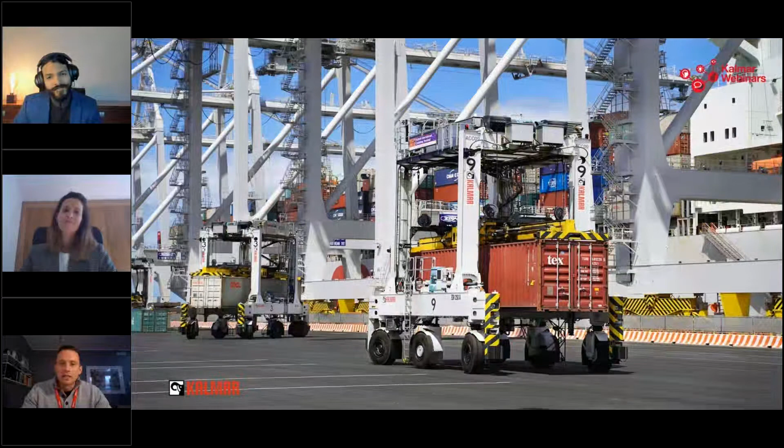Yeah, I would say it's like team figure skating—actually three words, at least in English, one word in Finnish, sorry about that. But I think my answer is quite aligned with Lucia's, because in team figure skating, everybody and everything has a crucial part as part of the team and part of the system, which then forms something beautiful that just flows. In case everybody or everything is not synchronized, the whole end result suffers. In figure skating, we're not meeting the score; in operational performance, it's then not met in a terminal environment. And also in team figure skating, sometimes accidents do happen—sometimes you might face a broken bone, and something more severe might happen.

Yeah, interesting. If you ask me, I would say complex. Even though terminal operation is just a link in the whole supply chain, there are so many interactions, so many sub-processes with different stakeholders within the terminal, and especially these days a lot of disruption. It really makes it quite complex, not only from the operational point of view, but also from the planning point of view.

So let's go now into our next question, the main topic for today: what is the difference between simulation and emulation?

Yeah, I would say that there are three different layers of operation. For example, here on the right-hand side, we could say it's a simulated environment where we have everything captured in one imaginary box. Then on the left-hand side, we have emulation, which has certain parts from the real world, but some parts are simulated.

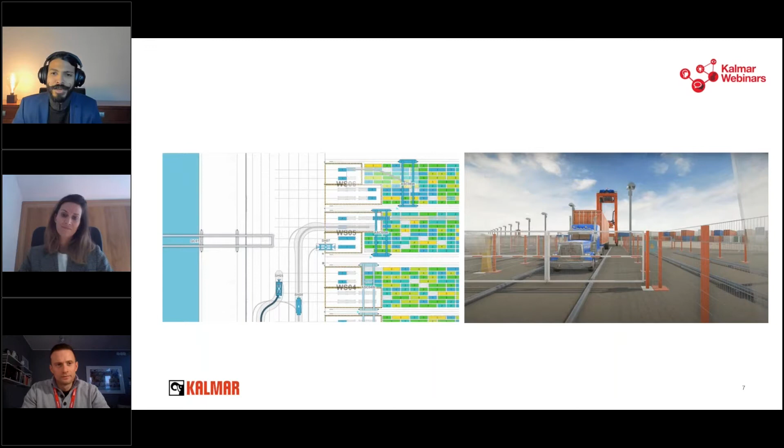So maybe that helps to get a more tangible image of what we talk about in the terminal environment every day. Yeah, really interesting thoughts, and it is important to be aware of the multiple ways we can use simulation and emulation. But now jumping into our next question, why do we need simulations?

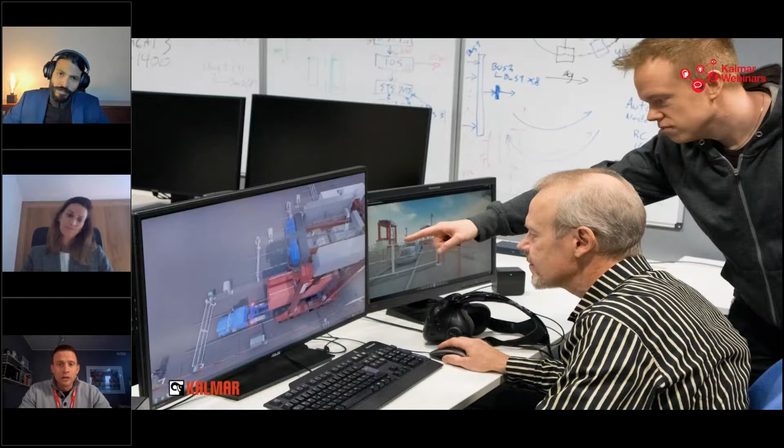I can take that one. I would say simulation is the quickest method to evaluate different operational concepts, for example different equipment types or levels of automation. With simulation, we can also get a first feeling of how a different layout would work for a particular terminal footprint, and it may raise questions you can then think about and find methods to answer those more detailed questions. Are you using emulation for that one, or do you need some other means?

Another example of using simulation is when the terminal wants to undergo a transformation, studying whether it's cost competitive to go from a straddle yard to an RTG yard that can provide more storage capacity. The simulation would enable modeling all those changes and evaluating, if I get such volumes, then it's more cost competitive, if not, etc. All this before doing any civil work, buying any machine, or undergoing any investment and the disruption of the terminal that all of this means, right?

Yeah, really interesting point, and it's a really useful tool to avoid assuming, just as Tommy mentioned. Any considerable change in a terminal layout would make sense to have a simulation done first. Yeah, and existing terminals that are not changing the operational concept can also benefit from simulation before major changes, for example changing the orientation of the stack. So Chris, question to you: how many terminal simulations do we roughly do in a year? Well, we're talking about 5 to 7.

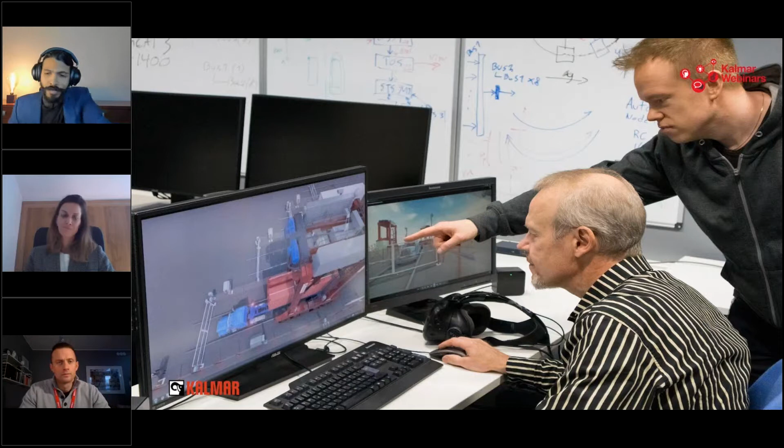So we got clear the difference between simulation and emulation, but then why do we need emulation? Any thoughts, Lucia? Yeah, I mean, emulation, for example, enables us to benchmark the performance of, for example, our scheduler or certain products. Also to fine-tune the settings, because there are different settings that you can adjust, especially on the equipment control side, that can provide you better results. So it allows you to try and test that and refine.

Yeah, as mentioned, for example, we use emulation to simulate the TOS, the GOS, equipment moves from the QC. We need all those simulators, the OCR readings when we are emulating. So in the end, you are testing a lot of integration, right? With the actual software component that is the most critical one, let's say, in the emulation that you're doing. Got it.

And how about you, Tommy? Yeah, I would say that mainly the emulation is used, in those deliveries where I have been involved, for quality assurance testing, QA in short, to ensure that the integration between the systems is working. Like Lucia explained, it happens in the delivery phase, but also during the lifetime of the terminal, when we do constant updates, or whenever updates need to be rolled out, they can be tested with the emulation environment before rolling them to the actual production.

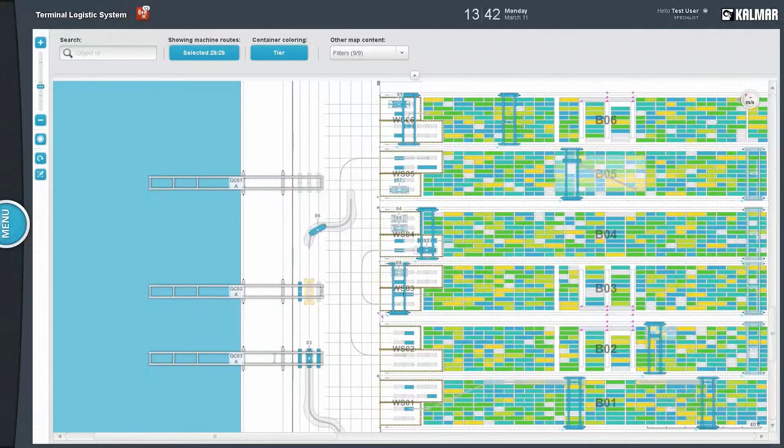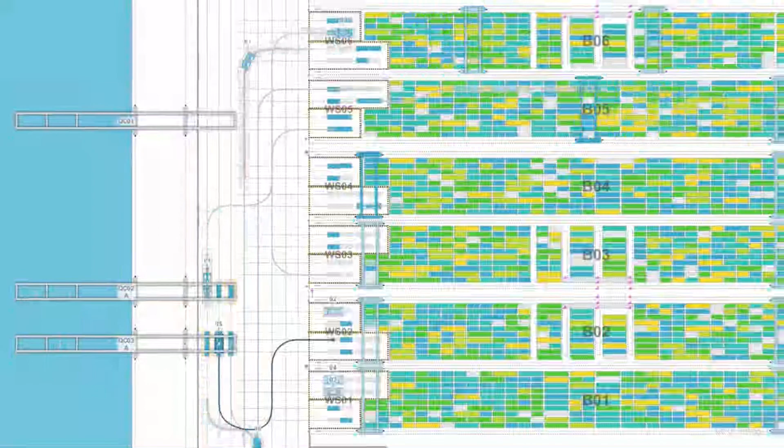So here we can see the actual piece of software, for example, the graphical user interface, where people can drill into certain machine details and understand, with the sped-up operation, how the different parameters play out. And here all the actual software is working in the background with certain simulated, for example, quay cranes, and possibly also simulated work queues from the terminal operating system.

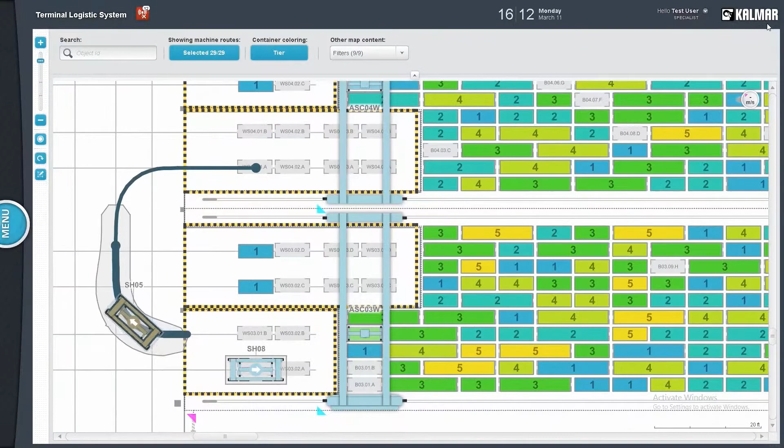There are also capabilities to do fault injection, especially to manage exception handling for the operators, so they know what they need to do in certain conditions to keep the vital operation of the automated machines going. And they also get a good feeling for which kind of information is generally available, for example, on the container inventory, and what kind of machine details you can open up and so on. So really good pieces of information before letting the guy into, for example, the control room.

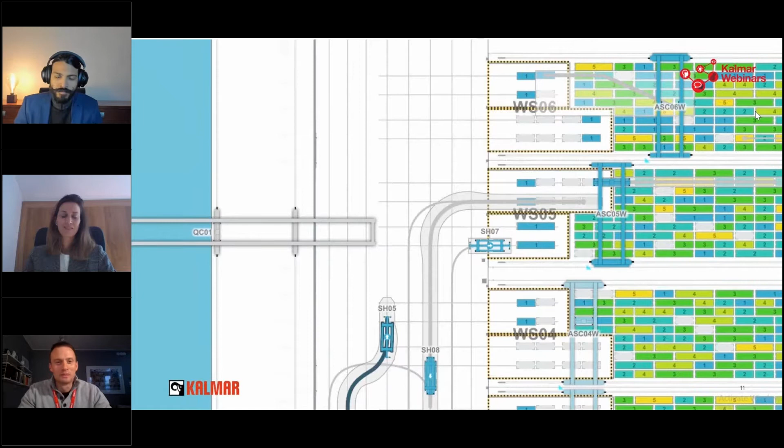Yeah, really interesting, Tommy. I would really love to have a lot of greenfield cases, but the reality is that there are quite few worldwide, and most of the cases are conventional terminal cases. So this question goes really to the spot. Are these tools mostly used on automated terminal projects, or are they also useful for conventional terminals?

Well, both really, right? Emulation is typically more associated with automated terminal deliveries because we tend to test the ACS and the integration with the TOS. But simulation is applicable to all. Simulation is a modeling tool. So you can take that as a baseline to measure the impact of any change, whether you're considering deploying more equipment or a different type of equipment, more or fewer people working. It can be about the financials, the CO2 impact, many things. So it's definitely applicable to both.

Yeah, and if I may add, Lucia, the reality is that in most terminals there is no room for testing on a real case scenario, it's too risky. So these tools are really useful to test those changes with less impact on the current operation. Yeah, that is so true. And those tests, when they're done, are very disruptive, so they have a huge impact. So now if we are talking about brownfield cases, do you believe these tools can be used for planning purposes, like planning operations on a daily basis?

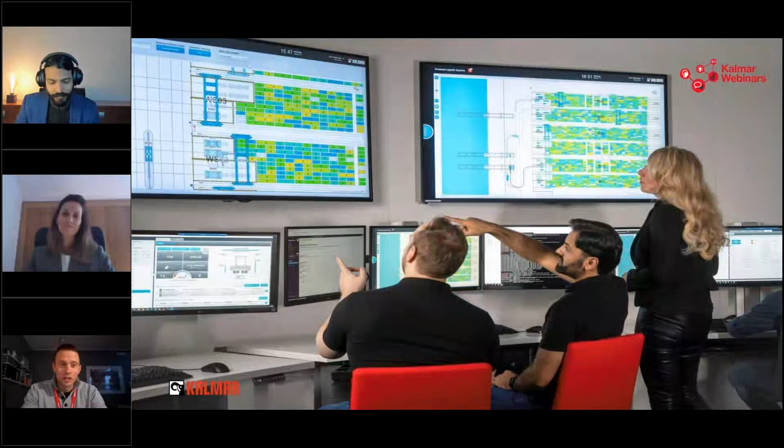Well, I would say that today those tools are not really used for that particular purpose. But I think we as a whole industry really should aim for that. And I think we could take an example from the Formula One race. So for every different track, you need to fine tune your plan, do your settings, and then plan how you drive. I think for the vessel visit, we should do exactly the same thing.

We should look at how we optimize the decking, a bit of the yard strategy, how many machines we would apply for that particular operation, where we should place our quay cranes, and not only considering the quay crane productivity, but understanding the whole system behind the quay cranes, and then of course we should operate accordingly; the driver should drive according to the drive plan.

And then when we have done all that and we have executed the race, or we have executed that vessel, we should have a look at the plan, what we did using these particular tools, how it went, and how we could actually improve our work in planning so it would fit even better for the next race or for the next vessel.

Yeah, fully agree with you, and you just made me remember my old days at the terminal. But I may add that there are two critical aspects if you want to really deploy these tools on the terminal. The first one is you really need to understand the way of working, because in most terminals it's vessel after vessel, and that's only one piece. You also have the gate, trains, barges, many others. But at the same time, to deploy these solutions, you really need a lot of development, people and skills to be able to use these tools in a proper manner.

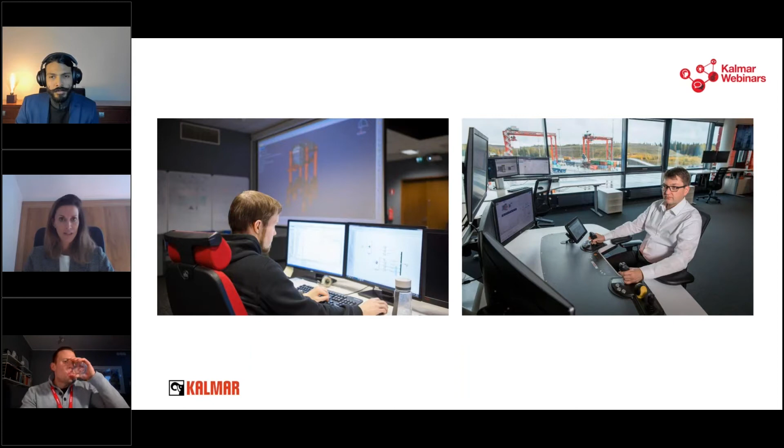It's called Scenario Modeler, and it is basically composed of 4 different modules. To describe them briefly: the Emulation Platform Management System, or EPMS, which is basically the product that handles all the configuration setups of the scenario. We're able to store scenarios, replay them, get statistics after running the different plan scenarios, introduce exceptions, for example. It allows a lot of things in the configurations.

Then we have the external simulators to simulate external inputs such as the TOS, the OCR, and others. Then we have the CHE simulators, which are equipment simulators for manual equipment like the QC, for example, that is part of every flow, regardless of what type of equipment you have deployed in your terminal. And the fourth is the training manager. We have been mentioning training a lot, and for remote operator training it is a very powerful tool.

Yeah, I really like especially the training aspect, and it's really critical. And you already mentioned this one, but it's so cool that you can start testing the integration of the automation and different aspects without having physical cranes on site. But then again, Lucia, this goes for you, since you're more focused on product development within Kalmar. How do you really use these emulation tools during the development process?

Yeah, of course we use it. Not for every development, but to assess the performance impact of a new feature, it is the perfect tool to use, and we have to use it. We have the tool, and we are improving our product to reach higher performance. Of course we have to use this tool, right?

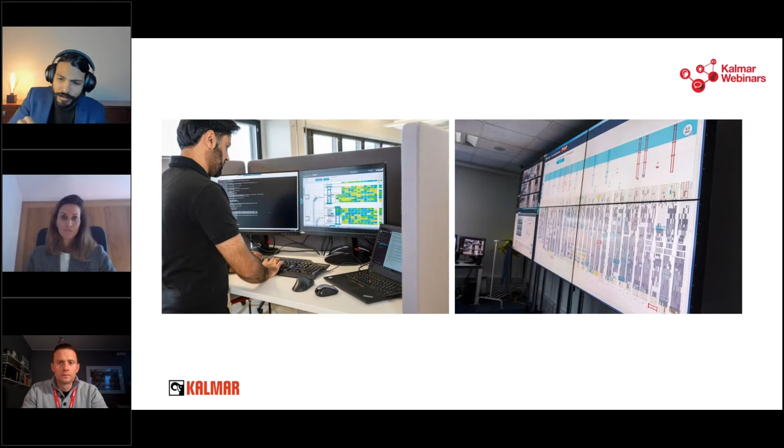Really interesting. I also know you mentioned this, but we also have capabilities to not only focus on the Kalmar side, but also include the different parties involved in the big picture when we're running the terminal. So now, the following question: in which cases should we use simulation, and in which cases should we use emulation? When is it a must to run an emulation?

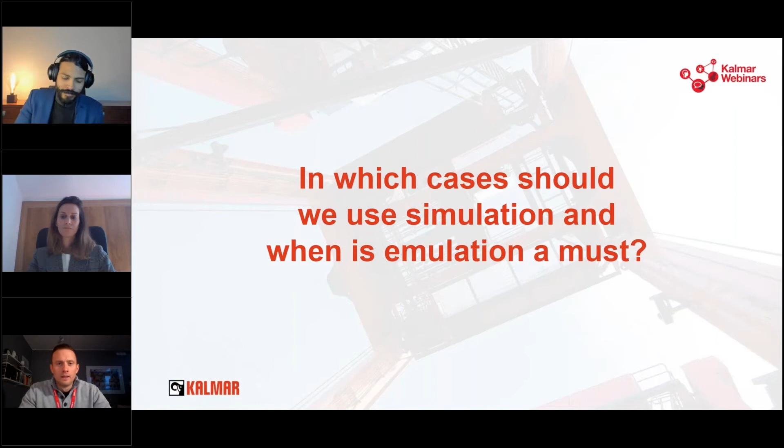I would say that the simulation is a must, and it is the most obvious tool when we look at the operational concepts and the level of automation. When we think about the investment amount, and look on a high level at what the operational cost would be, it helps to have the business case justified, and for example gives something more visual for the authority approvals and things like that, to take those to the next level. So I think the simulation really gives a good base for that.

Then with emulation, when we take it to a more detailed level, I think the main things would be, for example, to ensure the integration work already in an early phase of the deployment. But also I think it would be a brilliant tool to check whether there are any gaps in the system or in the integration when you do your end-to-end business flows for your particular site.

And then additionally, I would hope that our customers, the terminal operators, the procurement and so on, would require more of this kind of terminal emulation from the automation system suppliers during the tendering phase. With that kind of model, we would get positive pressure to show, first of all, that the system we are selling does exist, that all of the required functionalities are there, and of course we could also look at the performance we could achieve with that particular layout and that existing system in the emulation.

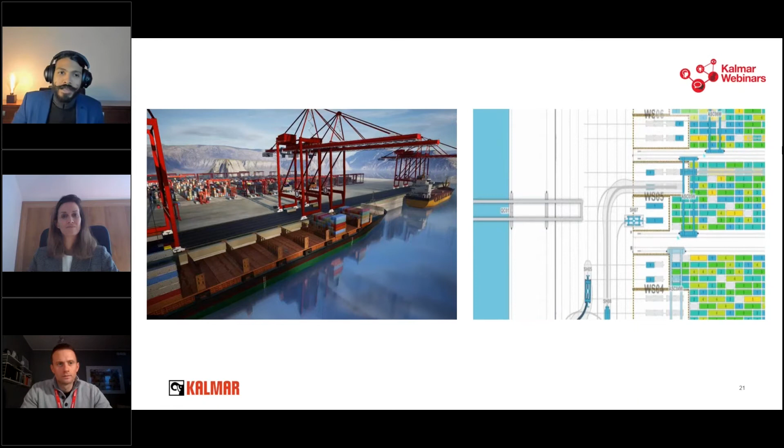So let's keep moving. Probably a lot of our audience will be asking this question, so let's just go for it: KPIs. When we run this type of simulation and emulation, what KPIs are we currently measuring with these tools? Any thoughts here, Lucia?

Yeah, sure. It depends, but typically they're operational KPIs, related either to performance or cost. In the Scenario Modeler case, we provide the QC moves per hour, which is a very widely used KPI. But we do aim to offer more KPIs out of the box in the near future. We realize it's really important to have good numbers to compare each run and so on.

So yeah, we recognize the importance to have those numbers to be able to take the right decisions after you're doing this emulation or simulation. And how about you, Tommy?

Yeah, maybe to add on that, I think our goal would also be to invest a bit so that we can provide the KPIs which would be more aligned with the scope of supply we have when we are providing the equipment and the equipment-related automation.

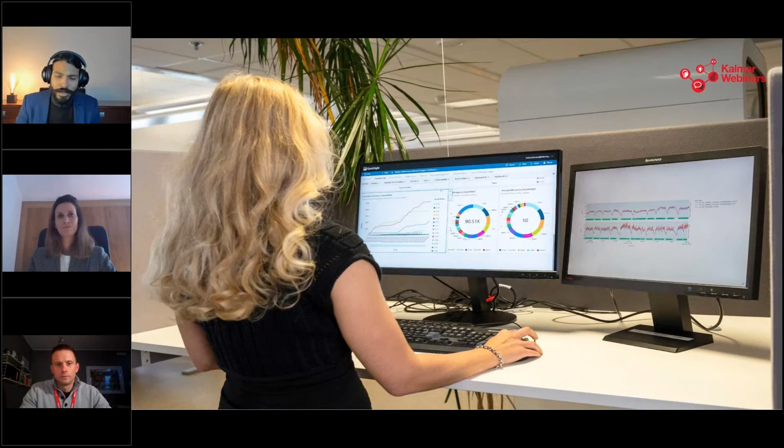But normally when we talk about simulation and emulation, we focus quite a lot on operational KPIs. But what about CO2 emissions, especially these days when there is increasing pressure in legislation regarding environmental aspects? Any thoughts there?

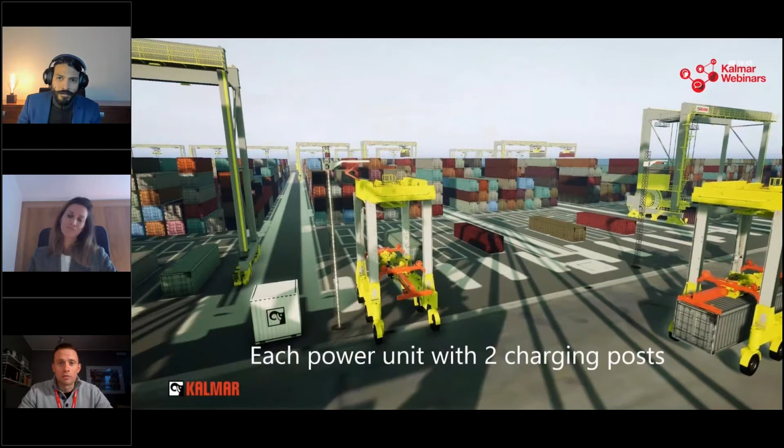Yeah, I think simulation is a really good tool for multiple purposes. For example, to have an indication of the CO2 amount of the operation. And of course there are other aspects we could consider, like noise pollution and light pollution, or vibration and shocks, especially if the terminal is planned to be next to the suburbs. And also the energy usage of the whole site and which kind of energy we use.

But we should also consider how many people and operators we need locally. Especially with what COVID has taught us about remote work, maybe some people can operate from home or from other remote places. So have some understanding of where the work should be done to run the planned operations.

Yeah, and if I may add here, many of our customers in Europe and in some states in the US are evaluating especially this aspect, using these tools to evaluate CO2 emissions, comparing different handling concepts, creating CO2 reduction roadmaps to meet targets for the next 5 or 10 years. So it's really interesting, all these features you can use with these tools.

Sadly, we are almost reaching the end for this topic. We could spend all day. I'm really passionate about this topic, but this is a must-ask question, and I am 100% sure our audience will love this one. So, Tommy, how much should you rely on the results of simulation and emulation?

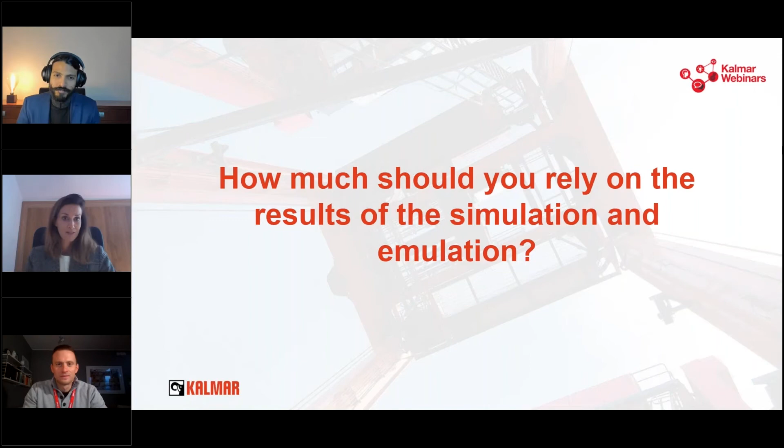Well, the results of the simulation are always a good indication of how reality will behave, right? But they are produced in a vacuum. We have been talking about that already. So we always need to keep in mind that it is a controlled experiment, whereas in the terminal there's a lot that is out of the control of the scope we're trying to test, right? And the human factor always has to be considered.

Yeah, but I think there are of course good mechanisms in place to make the emulation and the simulation more accurate, especially during deployment, or over the lifetime of the whole terminal. For example, we have experienced that we can run so-called kinematic tests, where, when the site is already there, we run a particular machine on a specific route.

And then we do exactly the same in the emulation, and we ensure that in the emulation environment that particular identical move is not executed any faster than in reality. So in this way, we can ensure that the simulator values are right.

Yes, even if we inject exceptions, which our tools allow in the scenarios, so you expect a machine to have a certain percentage of failure, etc., we are not able to reproduce 100% the complex environment of the container terminal, as we mentioned at the very beginning.

So all I'm saying is that these KPIs that we obtain cannot be compared with the real world KPIs, right? Because there are always assumptions embedded in there, and also limitations of how much we can adjust, even if it's a good simulation or emulation.

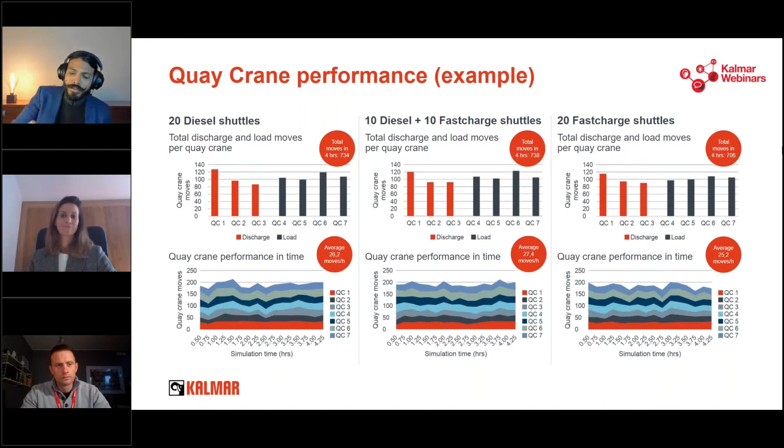So to summarize our discussion for today, I may say that simulation and emulation tools can really be used not only for automation or automated projects, but also for conventional ones. Both of these tools help us eliminate assumptions. They can be used in the UAT, or user acceptance testing, phases during product development, just as Lucia mentioned.

For the brownfield, it's really useful because you can optimize operations. When we are talking about greenfields, you can test new technology that you will be deploying. I really love these training purposes because it's really cool to be testing all these changes before they get deployed in the physical terminal. And finally, we can really improve terminal planning, and we hope to see more and more of this approach in the upcoming years.